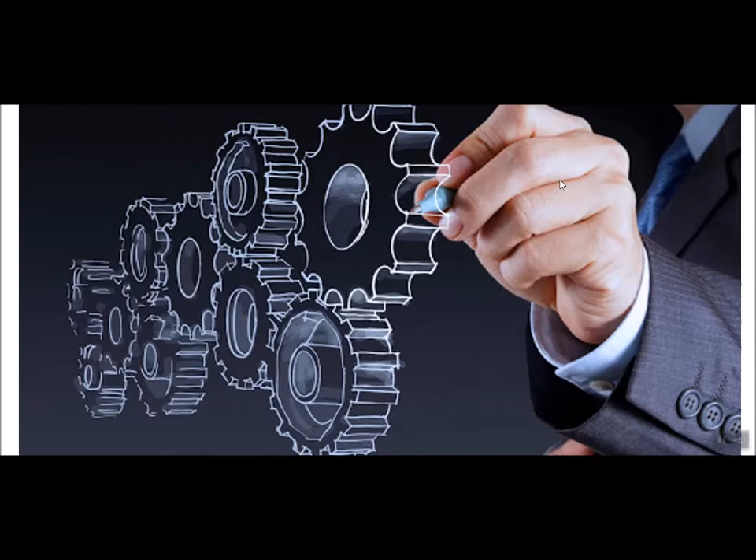Visualization a lot of times is looking at potential, what could be, the possibilities that are there. It's useful when thinking about brand new things that don't exist yet, how they might go together, what the requirements are, and what the restrictions or constraints of a design might be. So we're talking about opening up our mind's eye and seeing things that we don't see in front of us.

So you can do this. This isn't some special power that only mystics in Himalayan monasteries develop. This is an ability that anyone can develop with a little bit of practice. Visualization also involves looking at things and seeing beyond what's there to what could be.

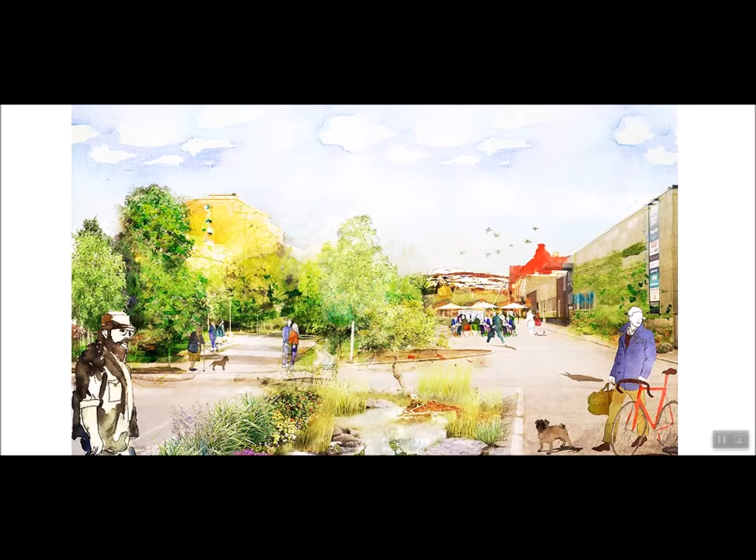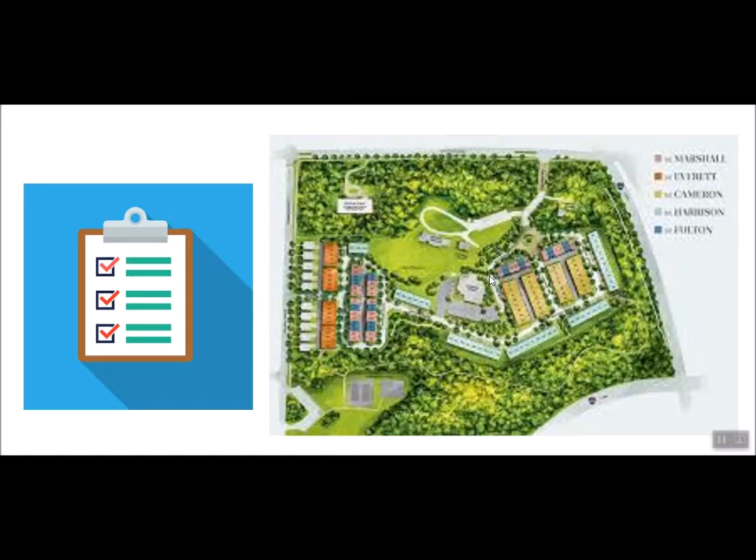Visualization allows somebody to take a list of requirements and restrictions and use that information to generate ideas. For example, a client may have certain requirements, and the layout and design of a location has to meet those things. In their mind's eye, as they're reading, they can start seeing what could be made, what the possibilities are.

Visualization allows somebody to look at objects and imagine them going together or coming apart, seeing how things work when you don't actually have them in front of you.

Visualization allows us to design new parts that might connect or fit into existing parts. Imagine we had the top materials here and the bottom materials here, and we didn't have this yoke, this connector. A person who can visualize will see the potential and what's required to connect the lower assembly to the upper assembly, and come up with a solution that looks probably something like this.

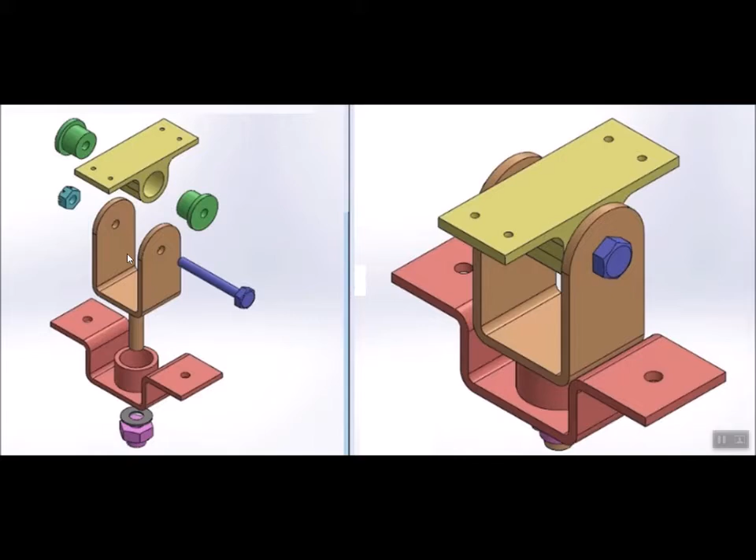Visualization allows us to take an idea and continue developing it until we've got several ideas, or until we've taken a rough idea and refined it to the best option.

When we were looking at sketches, there was a lot of visualization involved in some of those old sketches I showed you. For example, Leonardo da Vinci never saw a helicopter during his life—he lived during the Renaissance. He had never seen one, but in his mind's eye, he could imagine a device that twisted like a corkscrew through the air. He was able to record those ideas on paper, and now we can look back and say, wow, that's pretty amazing. He was able to figure something out.

Not that it ever worked, but the fact he got it on paper and was able to visualize something new is amazing. Same thing with his armored vehicle. There were no tanks during Leonardo's time, but he visualized a chariot or wagon that would be armor plated and could move along. He was even able to imagine what it might look like underneath, and we see that in the sketch over here.

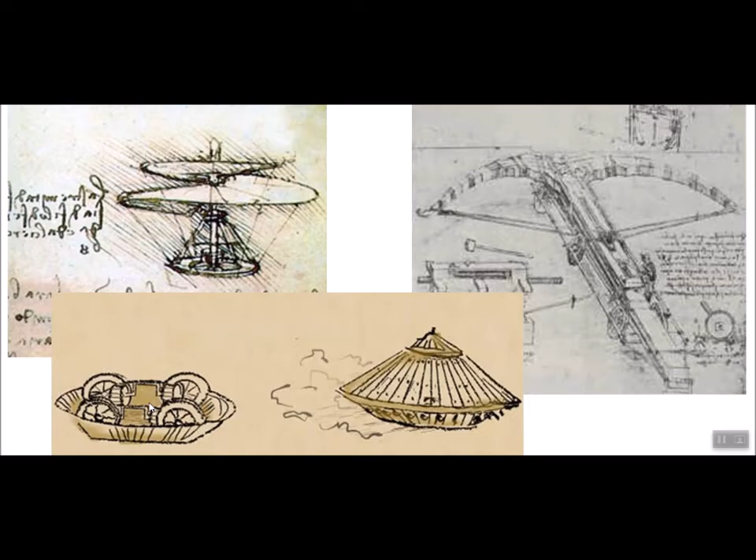Now, the sketching we did was meant to help you develop your ability to look at things and then record as accurately as you could neat sketches of what you were looking at. We've been sketching consistently since then—we've done a lot of sketching. So now we want to take it to the next level.

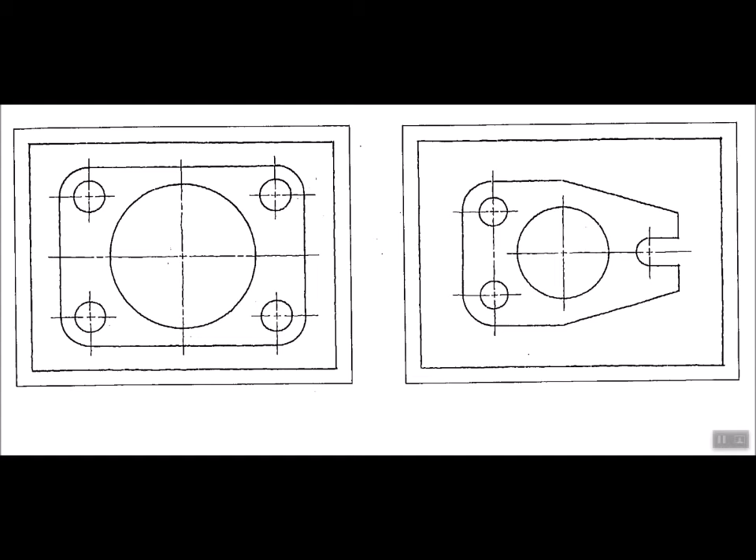The next level would be looking at an object and imagining what a 3D object is going to look like from multiple views and orientations. And we've been doing that, haven't we? Except now we want to go to the next level and give you problems that are a little bit more difficult.

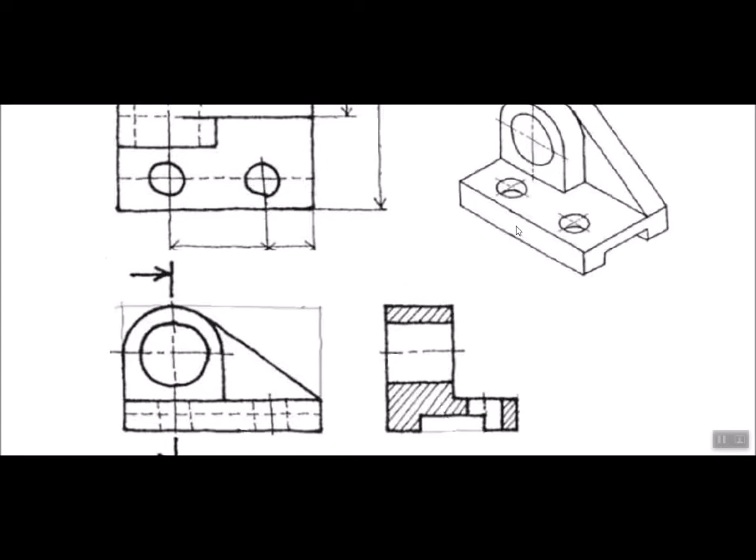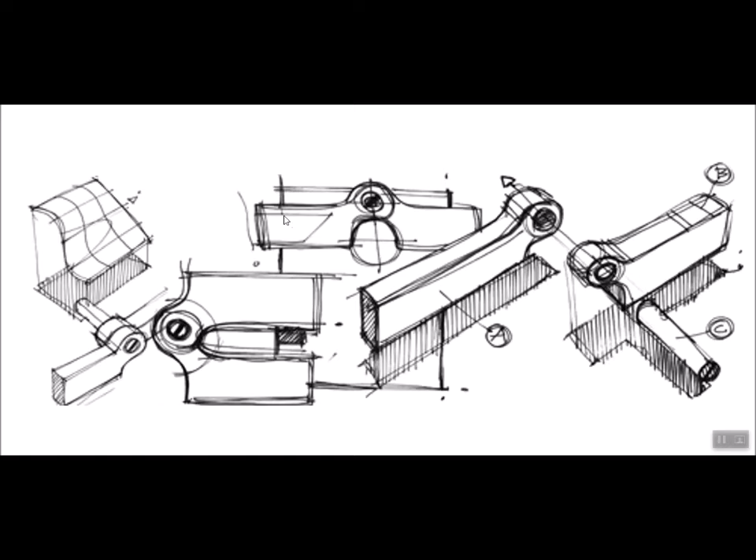The idea is eventually we get to the point where we can have an idea or a thought in our mind and fully develop it out—something that doesn't exist yet that we want to create. We can imagine how the parts go together and what it's going to look like when it's done. We can visualize it in our mind, and then record it in a sketch and eventually put it into a technical drawing.

And for products that exist that we might want to improve on or change the styling or aesthetic, that involves some visualization too. What could it look like if we changed it up and made it look nicer, more attractive to customers?

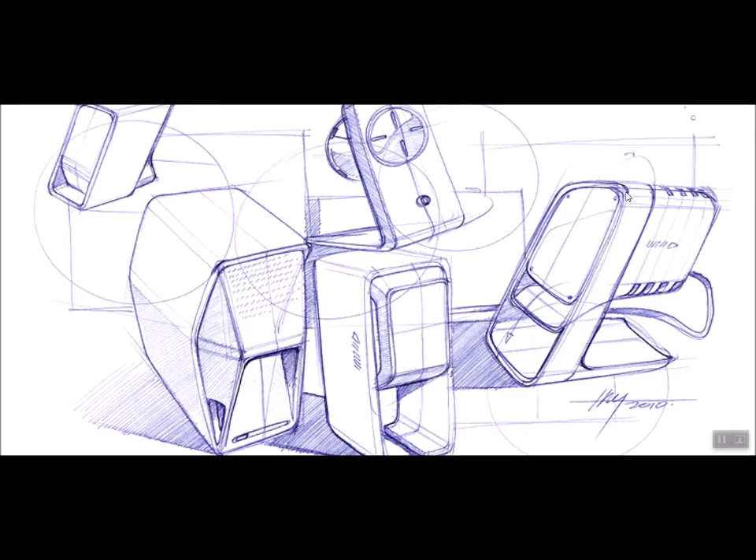A person who has visualization skills will be able to look at a technical drawing, like these construction documents, and even though the documents are just 2D drawings, they can visualize what the finished product is going to look like when it's all done.

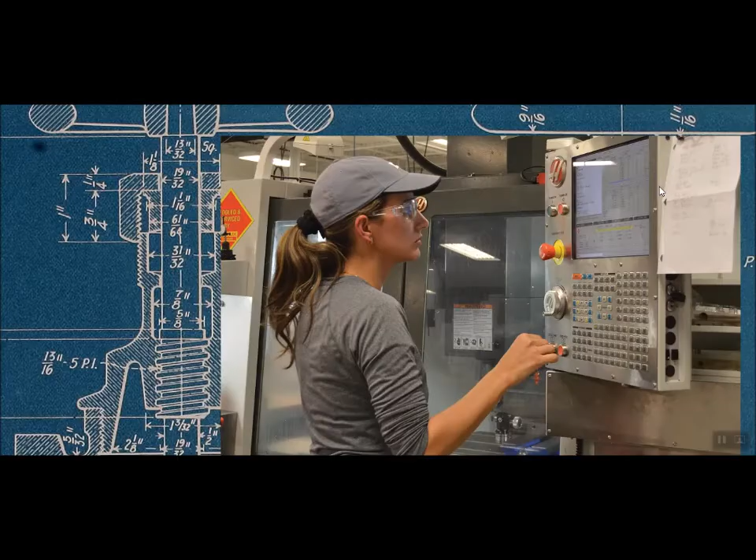In this case, this machinist, if she's able to visualize off the drawings she's working off of, then she'll know exactly what the parts are and how they're going to go together. And that aids the person making the parts as they are making them.

So we want to get to the point where we can visualize things, where we can look at something and imagine it from different angles, where we can take a concept in our mind and record it on paper accurately. To do so, we take some baby steps to get going, because this is hard—much harder than drawing something that's right in front of you.

So what is the front view for the given top view? If this is our top view, if we're looking at an object, can you imagine a 3D object that would have this as a top view?

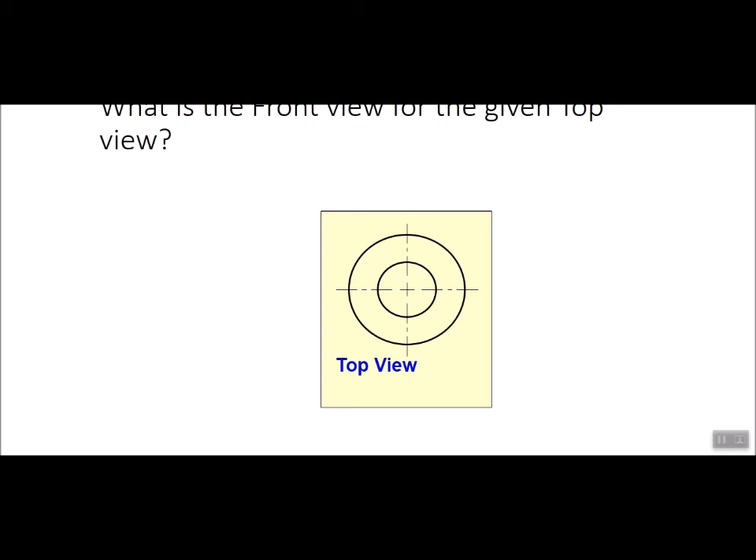Anything come to mind? Well, maybe that came to mind—maybe you visualize this object: a cylinder with a hole going through it. So of course that does satisfy what we see here in the top view.

But is that the only thing this could be? Is there any other possibility? Well, actually there are. How about this? Wouldn't that also meet the requirements of looking like two concentric circles from the top?

See, so visualization lets us imagine what could be from what we see, and then we can proceed from there.

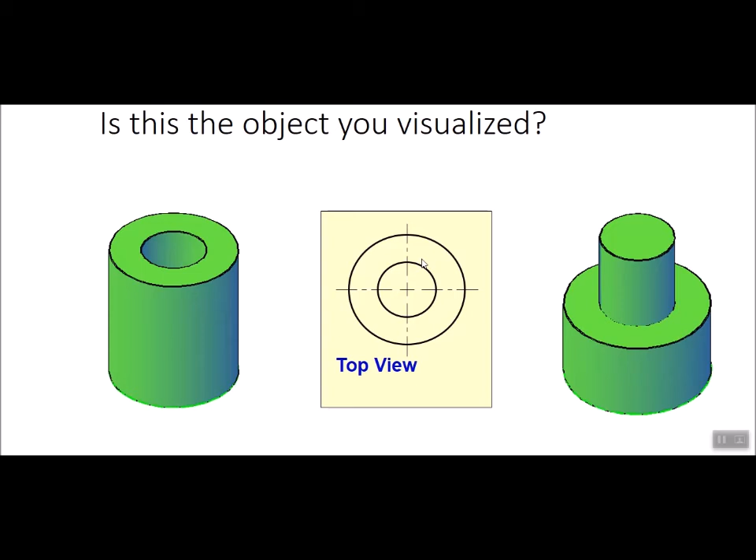Possible front views—what do you think some possible front views are? There's those two concentric circles again. Look at this—every one of these has the potential. Every one of these different parts is the front view for that top view. It could be any of those things.

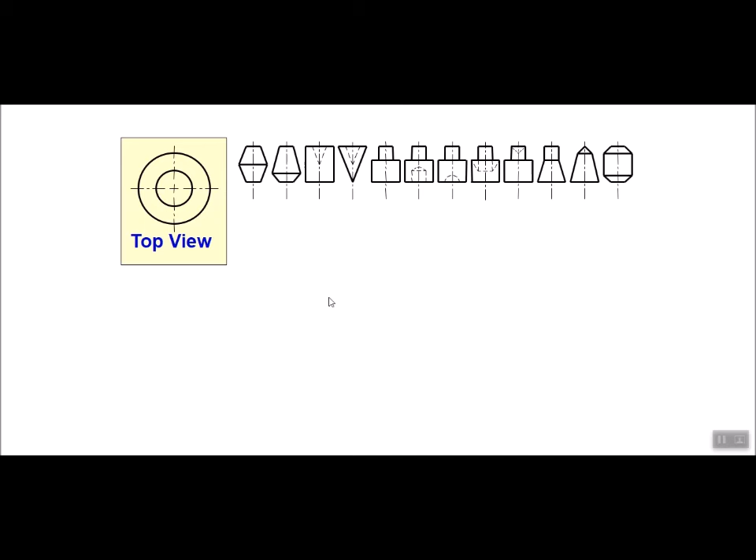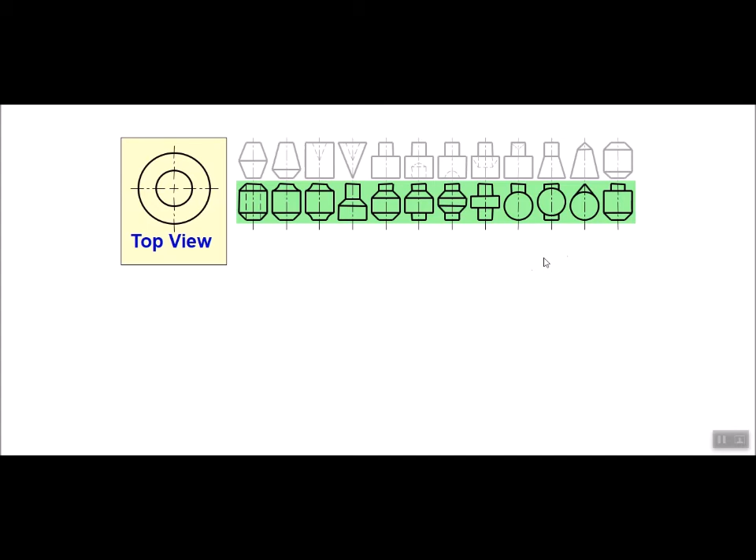And you know what? If you think that's a lot, guess what—there's more. It could be any of these cylindrical objects or objects with sphericity. It could be any of these objects. Let's add some more. It could be any of those objects.

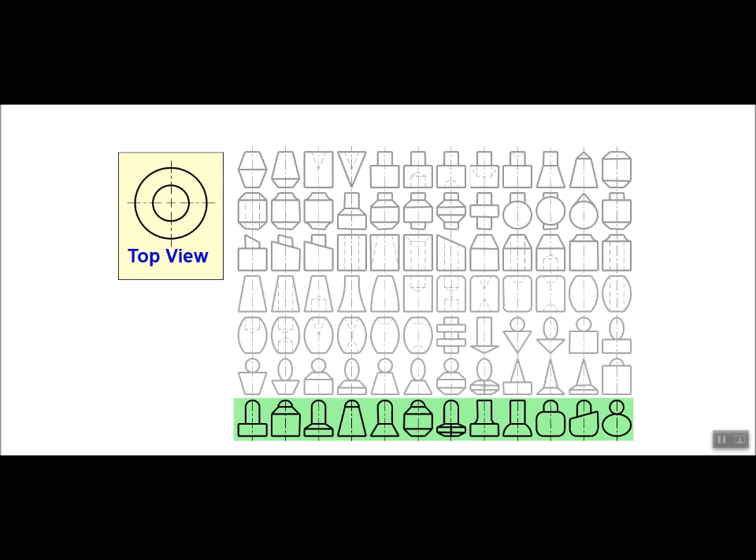So we're looking at 84 different possibilities, 84 different objects that could be generated off of a single top view like this. Visualization, if we can develop this part of our minds, helps us look at things—especially now that you have some technical training and know what object lines, hidden lines, center lines, and center marks are. We can start looking to see how things are made, how they go together, and what they would look like in these different visualized orientations. There's the whole gamut of them.

Now, it's true that a lot of people have a hard time with visualization because it's not something we normally do. In fact, there's an entire group of people, about 2% of the population, affected by this condition. Some people cannot visualize anything—they have no ability to visualize an image in their mind.

So if you're having difficulty, don't think that this is you. For one thing, it only affects a very small part of the population. A lot of times it's brought on by a traumatic brain injury. And if you have aphantasia, it's quite possible you also have an inability to recall sounds, smells, or other sensations. Chances are you would have been aware of this long before you came to this class.

So while it might be a little difficult to do visualization exercises, understand you're just flexing a totally different part of your brain, and you can develop this ability, barring the fact you have some very rare condition like this.